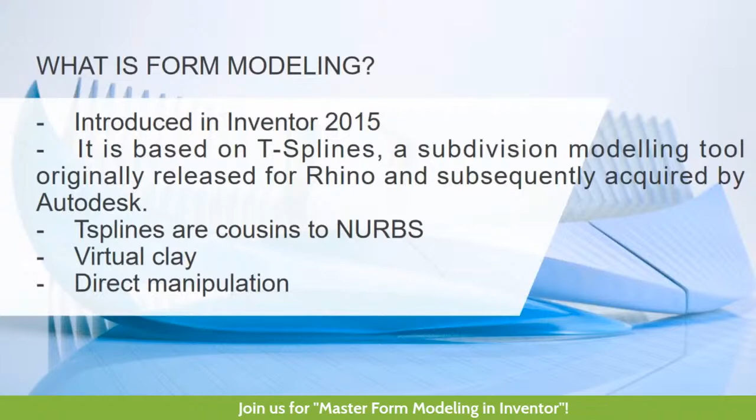So why do we need form modeling? It is faster and more intuitive modeling. It is used to enhance a model to create a more visually compelling design. Creating highly shaped parts can be difficult using conventional modeling techniques, but freeform tools provide an alternate modeling approach to explore and create freeform shape models using direct manipulation. And lastly, it's easy to achieve smooth corners and shapes.

In this section, we're going to talk about the difference between a solid and a surface. A solid is considered a lump of material, and it has a parametric design with parametric history associated with it — you've got extrusions, revolutions, fillets, holes, and similar features to build a solid model. It has mass that can be associated with a material, and the material density combined with the volume gives you that mass. It also has a center of gravity calculation, and it permits operations like your join command, or your join, cut, and intersect options in extrude and revolve.

The difference from a solid to a surface is best thought of as an infinitely thin sheet of material. It has no mass whatsoever, and surface modeling focuses more on the external aspect of an object, developing it by stretching a surface over it with freeform tools available in Inventor.

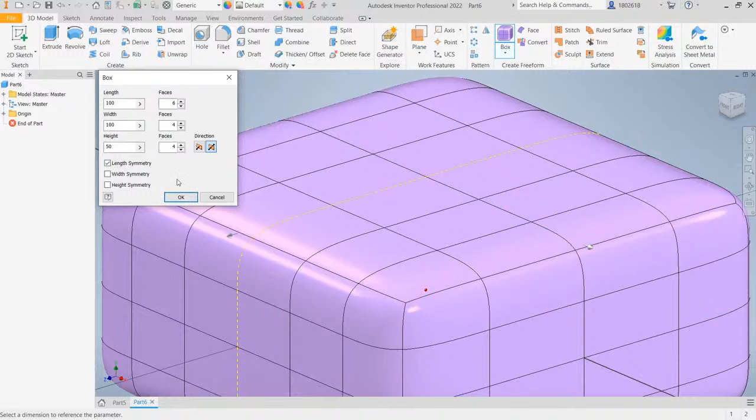Zoom out your view using your mouse wheel, then drag it to the center, and let's proceed to the next step. Click the Freeform tab. On the Edit panel, click Edit Form, and the dialog box will appear.

On the Edit Form dialog box, choose a filter to select a specific type of geometry. For points, only points are available for selection. For edges, only edges are available for selection. For faces, only faces are available for selection. For all, points, faces, and edges are available for selection. And for a body, the whole body is available for selection.

Optionally, in the Edit Form dialog box, choose Selection Options. Select Loop after you select an edge to select the entire chain. But first, we need to change the filter to Edge in order to select the edge of the figure. Then left-click on this edge, then click Loop under the Selection option. And as you can see, there is a loop in this line.

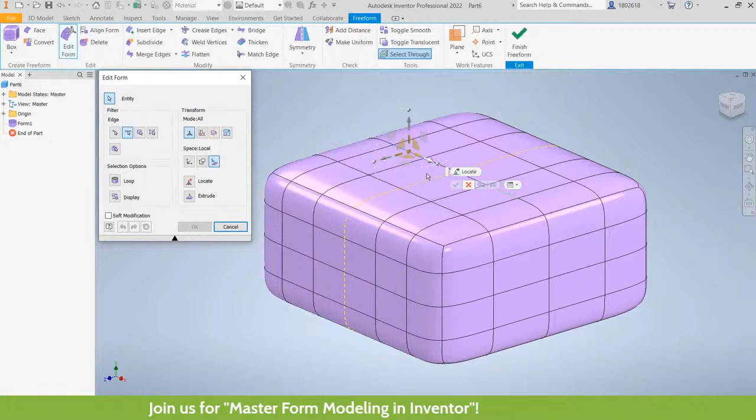And now we are done talking about Edit Freeform Geometry. Let's proceed to the next command.

In this video, we will talk about Align and Delete Freeform Geometry. Use Align Form to precisely reposition the model from a source symmetry plane or vertex to a target plane. Click the Freeform tab, and under the Edit panel, click Align Form, and the dialog box will appear.

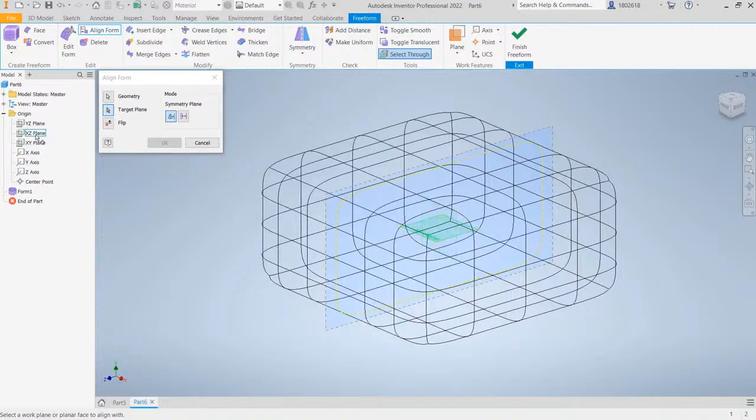Enable the Symmetry Plane option if the body contains a defined symmetry and you want to select a symmetry plane as the origin. Left-click the symmetry plane, then select the target plane or planar face as the origin. For this one, we will use the XZ plane. As you can see, our figure aligned to the XZ plane. Then click OK to exit the dialog box, and let's proceed to the next command.

For the next command, use Delete to refine the model to get the shape you are looking for. Click the Freeform tab, and under the Edit panel, click the Delete command, and the dialog box will appear. For the filter, left-click with this point, and you can delete some points. Press Shift to select multiple objects. Then click OK, and as you've noticed, some edges that connect to that point have been deleted.

Click the Delete command again. For the face, left-click with this one. Left-click, left-click, left-click, and left-click. Then click OK. As you can see, we now have an open sheet body.

To delete a loop, double-click an edge to create a loop, then click the Delete command on the ribbon panel. As you've noticed, the loop has been deleted.

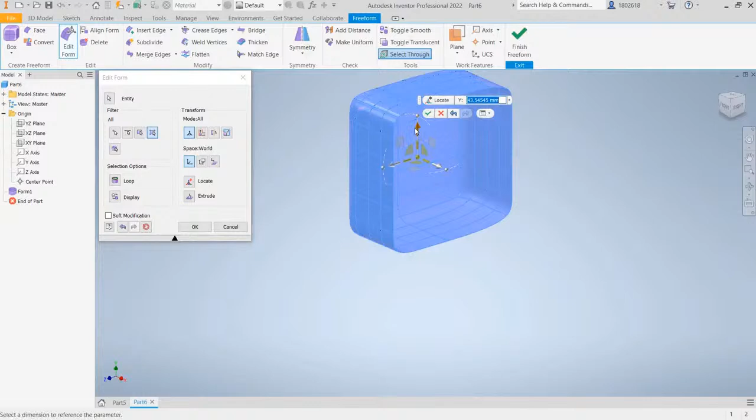Drag it to the center, then drag this manipulator upward. As you can see, we can freely move the figure, or just type the distance, 45. Then click OK, and drag it to the center. Now we are done with Align, Delete Freeform Geometry, and Move a freeform body.

In this video, we will talk about how to work with freeform edges. As you've noticed on our screen, we have two boxes set in freeform. For the first part, click the Freeform tab, and under the Modify panel, click Insert Edge, and the dialog box will appear. Use the Edges selector to select edges in the graphics window. Left-click with this edge.

In the Insert Edge dialog box, enter the location. The location specifies the position of the new edges using decimal percentage; the location must be between -1 and 1. You can also use a negative number for the location to reverse the insertion side of the edges. Just type negative on this one.

Then specify the insertion mode. For the first figure, we will use Simple as the insertion mode. It adds the edges you specify, which may alter the shape. Click Single as the insertion side, then click OK. For the second figure, click Insert Edge again, then left-click this edge on the figure. For the insertion mode, click Exact, then click OK. Exact adds the edges you specify plus extra edges to maintain the current shape.

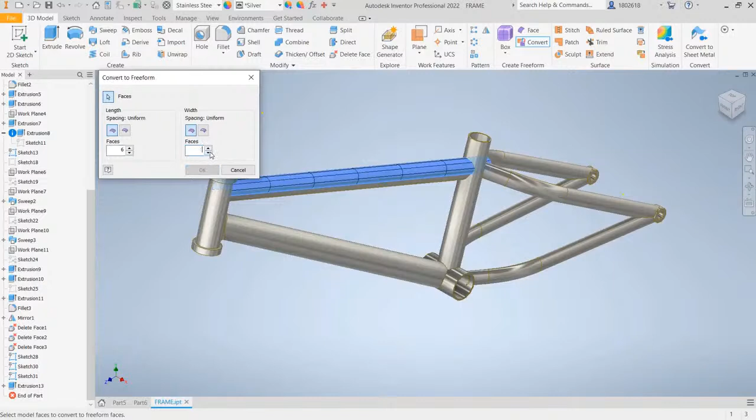Then click Uniform, and for the length key in 6, and for the width key in 7, then click OK. Our freeform feature is added to the browser, and the Freeform tab appears on the ribbon panel.

To apply changes symmetrically to the surface, you must add symmetry. From the Symmetry panel, select Symmetry, and the dialog box will appear.

Use Orbit to change the view of the figure, then press Escape to cancel the command. Select Face 1, and for Face 1 select this one, and for Face 2 select this one. Then click OK. Now you need to give freeform volume.

From the Modify panel, select Thicken, and the dialog box appears. Then select a freeform surface and key in 5 for the thickness.

Then cycle through the available types: sharp, soft, and no edge. Select sharp and make sure that the direction is normal and in the outer direction. Then click OK.

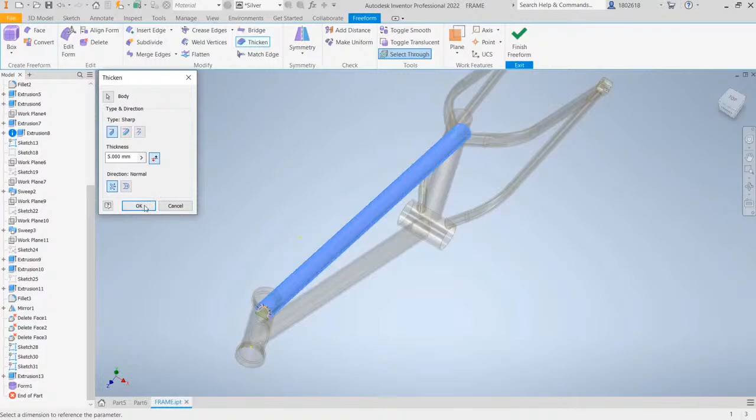You can divide some faces into smaller faces. Select Subdivide on the Modify panel. In the Subdivide dialog box, you are prompted to select faces.

Left click on this one for the first face, then key in 2 for the width, key in 2 for the length, and use Exact as the mode to preserve the current shape. Then click OK to exit the Subdivide dialog box.

Then click Edit Form on the ribbon panel, and the Edit Form dialog box will appear. Zoom in your view using your mouse wheel.

Press Ctrl to select multiple faces. Left click, and left click again. Zoom out your view, then zoom in on this one.

Left click, then change the mode into Translational. Left click. Translation reduces the number of manipulators on the screen.

After that, spot the difference between the space of World and Local. Click Local, and as you can see, the direction of the manipulator changes. Drag this arrow or specify the distance, key in 15, then press check to OK.

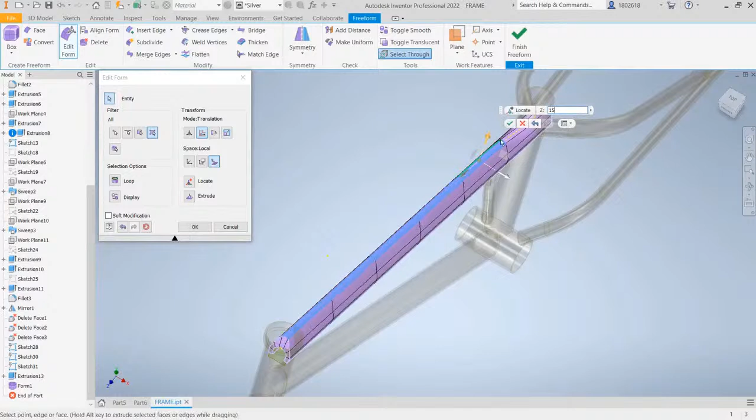As you can see, the shape of the body of the frame of the bicycle changes. Then click Finish Freeform on the Exit panel to exit the freeform environment.

With this video, creating freeform shapes to align with existing solid features is made easier with the Freeform Convert tool. Use this tool to help you build your freeform shape around your solid models. See you on the next video.

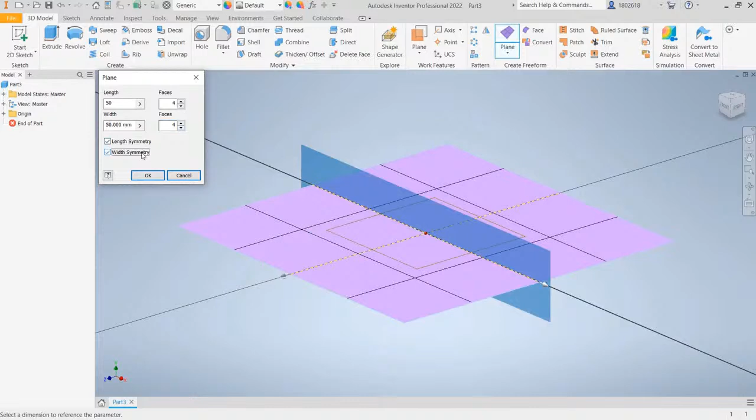To place the plane, click the XZ plane, then click the projected origin point at the center, and a preview appears. For the length, key in 50 with 4 faces, and for the width, 50 with 4 faces. Make sure that the length symmetry and width symmetry are checked.

Then click OK to exit the dialog box. Select this face, and as you'll notice, the 3 other sides are also selected because the symmetry of the figure is activated. Click Subdivide from the Modify panel, which splits existing faces into 2 or more faces, providing more control and detail to the freeform body. For the number of faces, width is 2, length is 2, and for the mode, click Exact to maintain the original form of the plane.

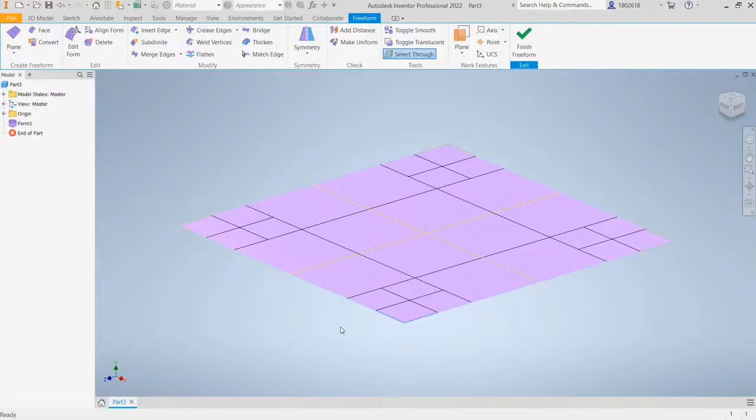Then click OK to exit the dialog box. After that, select these 2 edges on this side - press Ctrl or Shift to select multiple edges. Left click, then click Edit Form under the Edit panel, then click Extrude on the dialog box, then drag this arrow down. As you can see, a new shape forms because of the Extrude command.

Just key in -50, then click Check. Zoom out our view using your mouse wheel, then drag it to the center. Zoom in again, then drag it to the center. As you can see, we made 4 legs from a simple plane with the help of Freeform commands.

Then we need to select this edge from the leg of this stool. Click the arrow down beside Crease Edges, then select Uncrease Edges to remove a crease from the selected edges. Press Ctrl and select the edge of the bottom part of the leg. Click Insert Edge on the Modify panel. Leave it at 0.5 for the location, and for the mode, simple.

Then click OK. We need to insert 2 edges in order to create a support for the leg of the stool. Click Insert Edge again, press Ctrl, select these 2 edges, key in 0.7 for the next location, and leave it at simple.

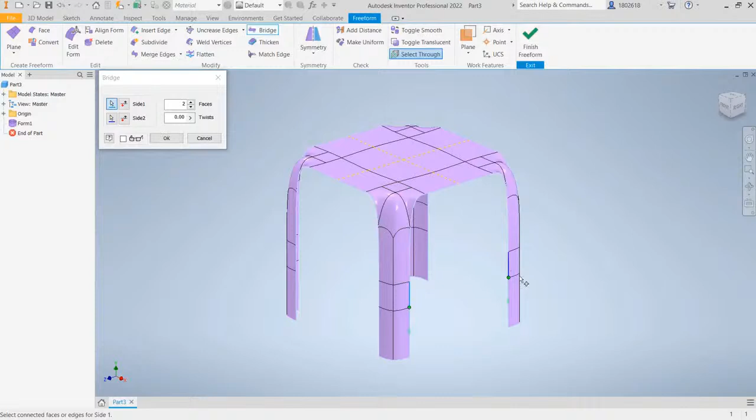Then click OK, and now we have these 2 edges. After that, we need to connect these 2 figures using the Bridge command. Click the Bridge command on the ribbon panel. For the first side, click on this side, and for the second side, click on this one. Then click OK. Repeat the process on this side.

To connect these 2 sides, click the Bridge command again. First side, left click, and for the second side, left click. Then click OK.

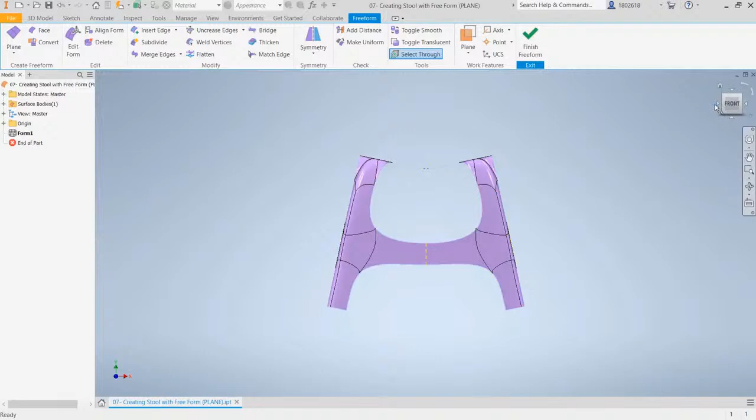Then click Check. Change the view on the view cube, left click anywhere in the workspace again, make sure it's in the green selection, right click, click Edit Form, change it into rotation, specify the rotation as -12, then click Check.

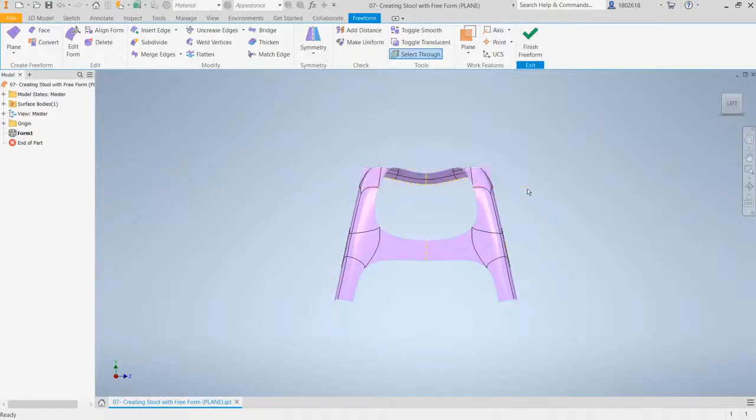After that, we need to flatten this part. Left click at the upper side of our figure, and the red selection would appear. Make sure the part we want to flatten is in the red selection, then select Flatten on the Modify panel. As you can see, it is already flattened. Click OK, then click Home on the view cube to get a good perspective on our figure.

Left click at any of these faces, then right click, click Edit Form, then drag this translation downward, and specify distance -5.

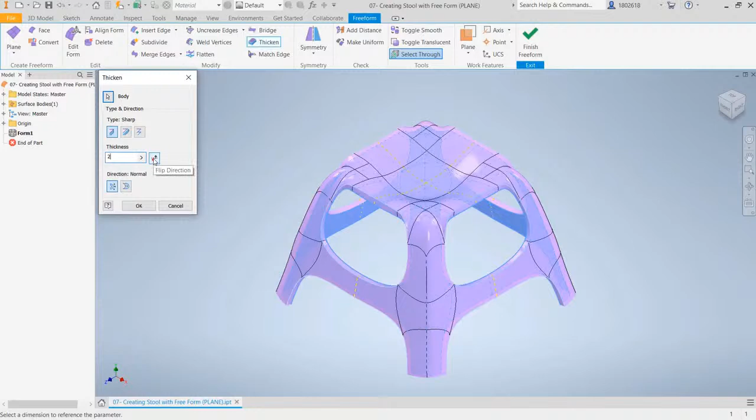Then press Enter. For the next step, we need to use the Thicken command to convert an open surface to a solid with soft or sharp edges. Click Thicken under the Modify panel, then click your figure. For the type, use sharp, and for the thickness, key in 2. Make sure the direction is normal, then flip the direction. Then click OK.

And now we're almost done with our stool. Click Finish Freeform on the Exit panel to exit the Freeform environment. Now our Freeform figure is in a solid form.

We just need to make a hole in the center. Just click the plane under the work features. Select Offset from plane, then click the origin from the model. Just click this XZ plane, then click the front view in the view cube.

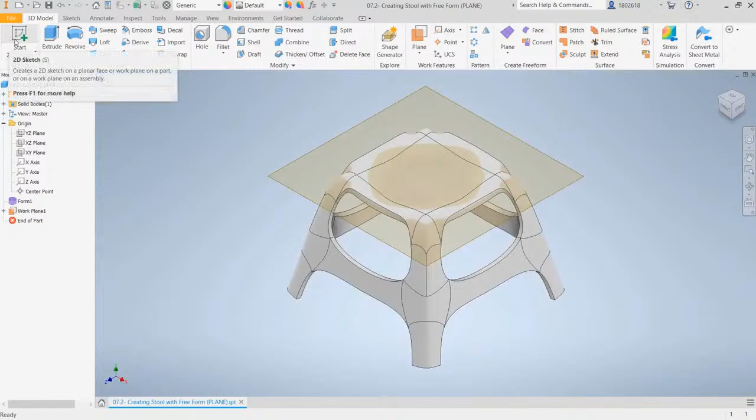Then drag this arrow down, or specify the distance -3, then press enter. Click the home view again on the view cube. Then click the Start 2D Sketch under the 3D Model tab. Select this plane to create a new sketch.

Then click the Circle command under the Create panel. Specify the center of the circle on this center. Then key in 12 for the radius, then press enter. Then click Finish Sketch from the Exit panel.

After that, we just need to use Hole under the Modify panel. Then click the center of the circle to make a hole. Then type the radius 10, then click OK. Select the work plane from the model, then right click, then uncheck the visibility of the work plane.

After that, we need to make a fillet on this side and this side. Just click the fillet command under the modify panel. Then key in 0.5 for the radius. Then left click the edges that you need to fillet. Left click, left click, left click again.

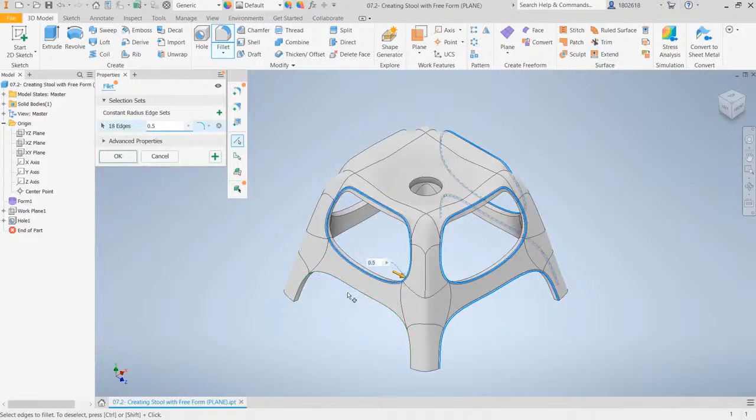And left click. Change the view in the view cube. Select this upper corner of the view cube. Left click, left click. Change the view again in this upper corner. Then left click, and left click. And now we're done making our fillet. Just click OK to exit the fillet command.

Just click the View tab on the ribbon panel. Select this visual style and change it into realistic. Then change the material into anything you like. And for this one, we're going to use light red.

And now we're done creating a stool with Freeform.

In this video, we were going to make a phone stand out of two boxes using Freeform tools. To get started, we need to set our units into millimeters. Just click the Tools tab, select the document settings, click the units, then change the length from inch to millimeter, then click OK.

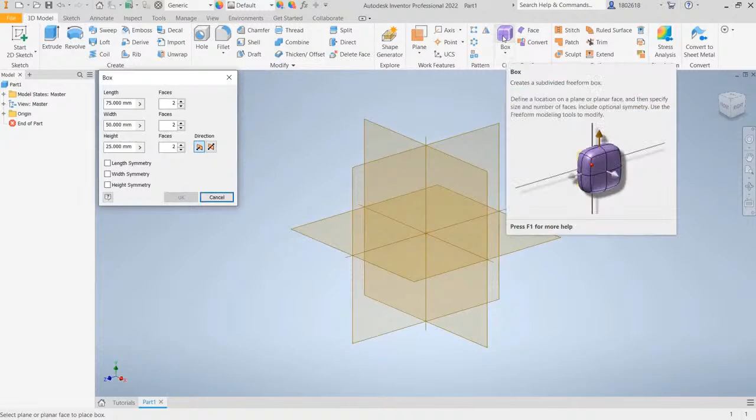Click the 3D Model tab. Under the Create Freeform panel, select the box. To place the box, click the XZ plane, then click the projected origin point at the center, and a preview appears. In the dialog box, key in 75 for the length, and for the width, key in 100.

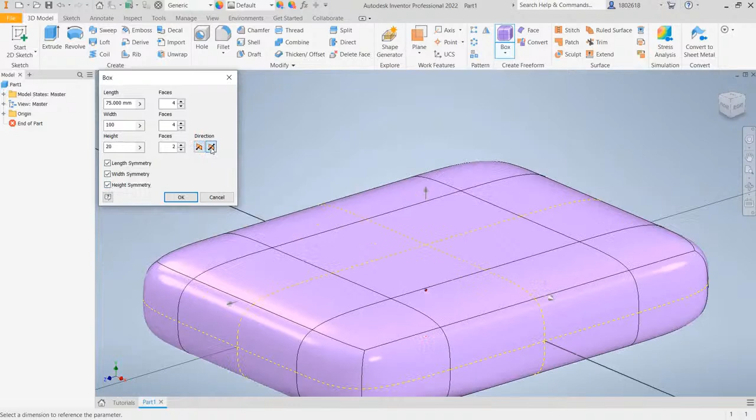And for the height, key in 20, and for the faces, key in 4 for the length, and for the width, 4. Then make sure that the length symmetry is checked, width symmetry is checked, and the height symmetry is checked. And for the direction, choose both direction, then click OK.

Place another box, but this time on the XY plane. But first, let's just zoom out our view using our mouse wheel, then drag it to the center. Under the Create Freeform panel, select Box, and for the origin, click the XY plane. Then specify the point of origin at the center.

Key in 120 for the length, 75 for the width, 20 for the height. Click both directions. Key in 6 for the faces. Key in 4. Check length symmetry, width symmetry, height symmetry, then click OK.

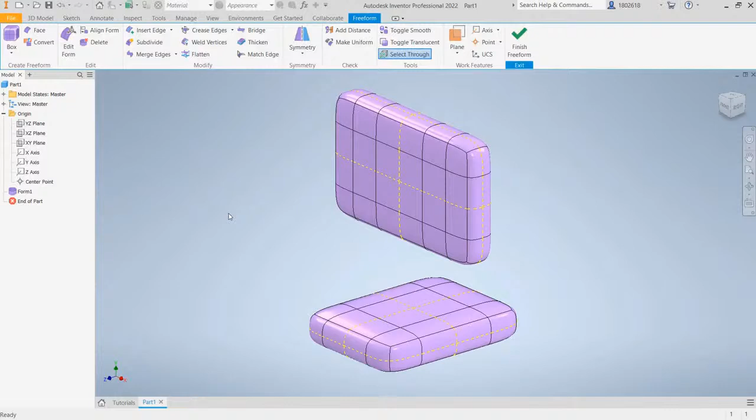Drag our figure to the center. Then we need to change the view in order to view the back of the second figure. But first, we need to move this one into the right side. Just click the right view on the view cube.

Then double click this figure to select the whole figure. Then right click, select Edit Form. Drag this translational, then specify the distance 75. Then press Enter.

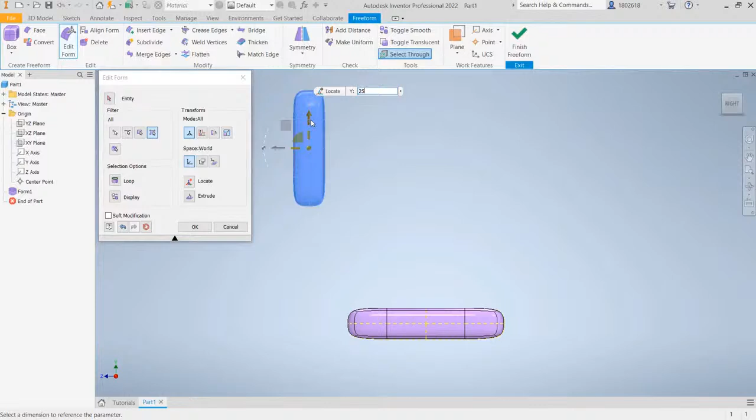Double click again, right click, select Edit Form. Move this translational in upward direction. Then specify the distance 25. Then press Enter. In order to connect these two figures, we need to use the Bridge command.

The Bridge command connects bodies or creates holes in freeform bodies. It allows us to develop smooth connections by specifying faces or edges to the bridge. We need to change the view. Just click the upper left corner of the right view. Then select the Bridge command on the Modify panel.

For the first side, just select these 4 faces. Left click, left click, left click, and left click. For the second side, left click, left click, left click again, and left click. Then click OK, and as you can see, the two figures connect to each other.

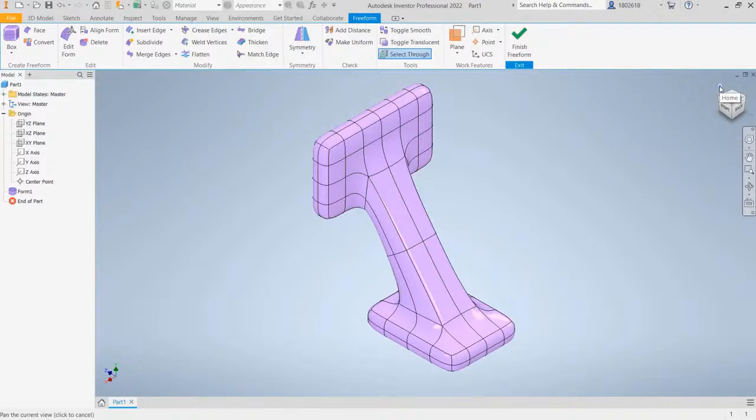Just click the home view in order to view it clearly. After that, we need to use crease edges on these edges in order to create sharp edges.

Just click the crease edges on the Modify panel. Then select the edges that we need to crease. Left click on this one, left click on this one, left click, and left click.

Change the view. Just left click on this corner. Left click on this one. Left click. Change the view again. Left click, and left click. Then click OK. Just click the home view again for the next command.

Then click Finish Freeform on the exit panel to exit the Freeform environment. See you on the next video.

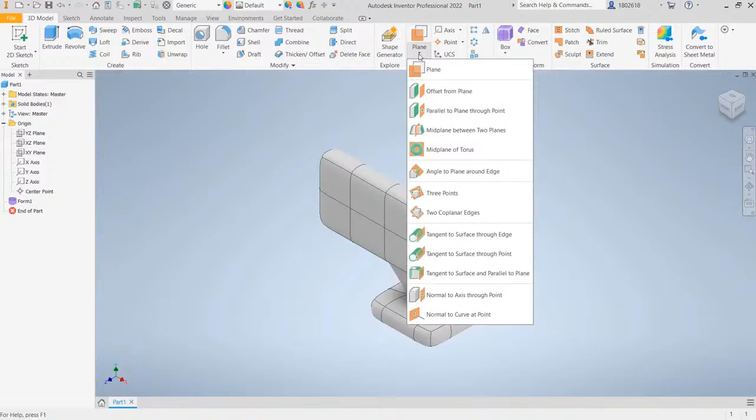For the finishing touches, we need to make an extrude cut part on this face. Just click the plane on the work features. Select offset from plane, and on the origin, just click this XY plane.

Then drag this arrow on this side. Then specify the distance 80. Then click OK. Select Start 2D Sketch under the 3D Model tab.

Select the plane. Then drag it to the center.

After that, just select the Slice Graphics on the lower side of the graphics window. Then click the arrow down beside the project geometry. Select Project Cut Edges. But first, we need to make sure that it is in the construction.

Just click this one first. Then left click this arrow down beside the project geometry. Select Project Cut Edges, and as you can see, there is a construction line on this side.

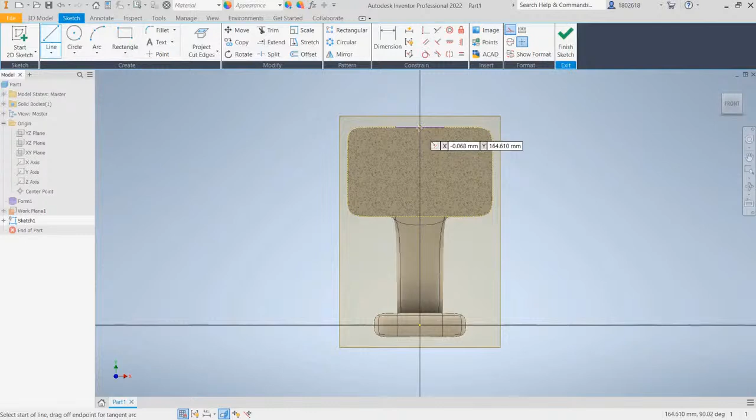Then select the line command under the Create panel. Specify the center on this one. Then type 5, then press Enter.

Enter again. Then select the rectangle command, but make sure it is not in construction line. Left click with this construction.

Click this rectangle under the Create panel. Make a rectangle at any dimension. Left click. Then we need to use dimension under the Constraint panel.

Left click with this first line, and for the second, this one. Type the dimension of 5. Then click Check. And for this side, left click on this line.

Left click on this point. Type the dimension of 5. Then press Enter. After that, we need to use the constraint in order to move in this line.

Just left click on this coincident constraint. Then specify the center of the figure. Then zoom in your view using your mouse wheel to have a better view.

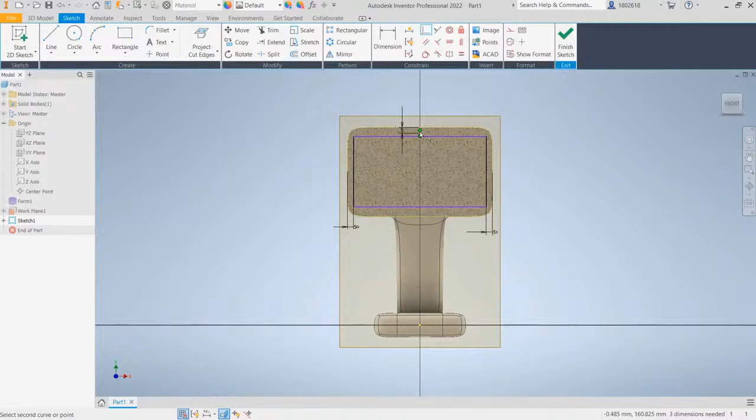Left click at the end point of this line that we've created earlier, and as you can see, it is now constrained.

Left click on the line command again. Specify the center. Type the distance 5, then press Enter. Press Escape to cancel the command.

Select the coincident constraint again. Select the center of this figure and the end point of this line, and now it's already constrained.

For the next step, just click the Finish Sketch on the Exit panel. Then click the Extrude command under the Create panel. Then change the output into Cut.

And now, we're almost done with our phone stand. Then click this work plane, right click, and check the visibility.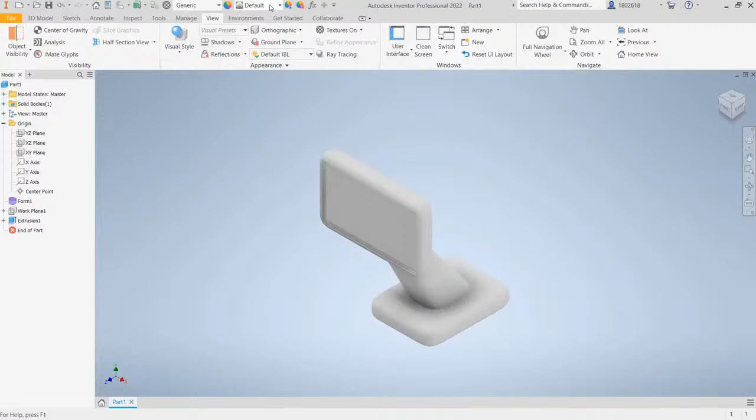And to make it more realistic, just click the View tab on the ribbon panel. Select the visual style and change it into realistic. Then click the material. Change it into orange red or anything you want as your material.

And now, we're done creating our phone stand.

In this video, we were going to make a chain using the Torus command. Under the Create Freeform panel, select the primitive toolset and select the Torus command. And for the plane, just left click with this XY plane.

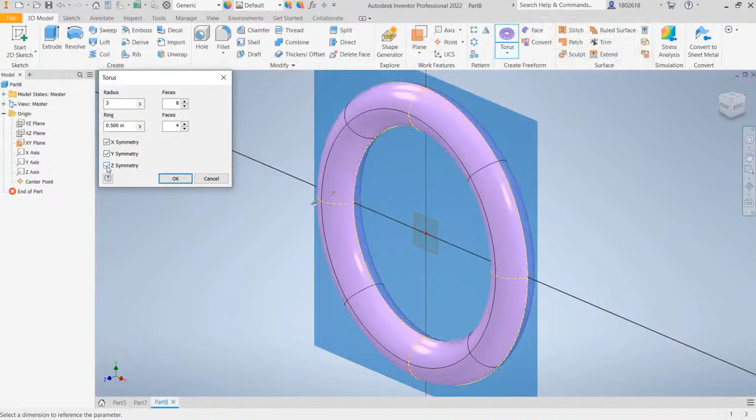Then specify the origin point at the center. And for the radius, key in 3. And for the ring, just leave it to 0.5. Make sure that the 3 symmetry is activated. Just check on this one, check on this one, check on this one, then click OK.

After that, click the front view in the view cube. Select these faces. Just press Ctrl to select multiple faces. Left click, left click, left click again, and left click. And as you've noticed, the other side of the torus is highlighted because of the symmetry.

Just click the home view. Then right click in the workspace. Click the edit form.

Drag this arrow on the right side and key in 1.5, then press enter.

Click the front view again. Select these faces again by pressing Ctrl and left clicking each one. Then click the home view again.

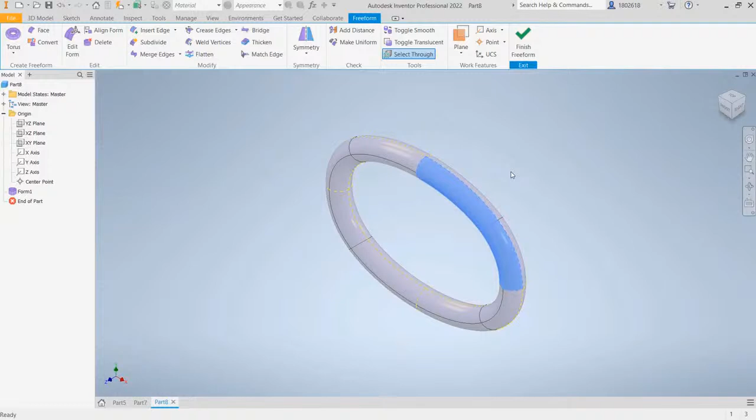Right click in the workspace, click the edit form, drag this arrow on the left side, key in 1, then press enter. Drag this figure into the left side.

We need to copy this figure in order to make a chain. Just double click the figure, then press Ctrl C on the keyboard, then press Ctrl V to paste.

Drag this arrow on the right side, then key in 15, then press enter. Then we need to align this figure on the XZ plane. Just click the align form.

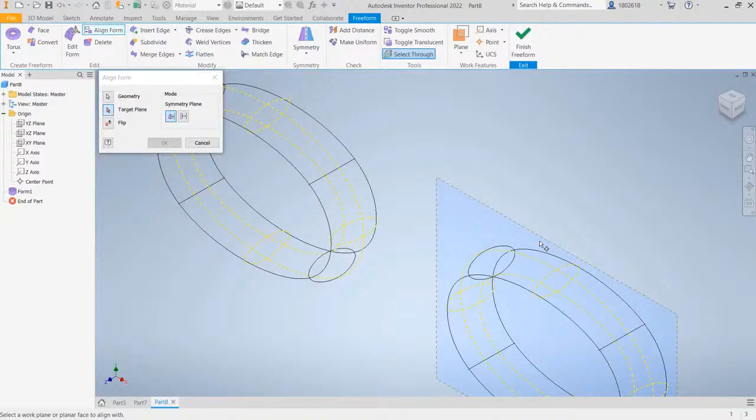Click this XY plane, and on the origin, click the XZ plane to align it on the selected plane. Then click OK to exit the dialog box.

We need to move this figure into this one in order to look like a chain. Double click the figure again, right click in the workspace, click the edit form, drag this arrow on the left side, key in -7.5 for the distance, then press enter.

Zoom out our view using your mouse wheel, then drag it to the left side.

We need to copy these two figures in order to complete the chain. Double click this figure, then press Ctrl to select another figure, double click, press Ctrl C for the copy command, then press Ctrl V to paste.

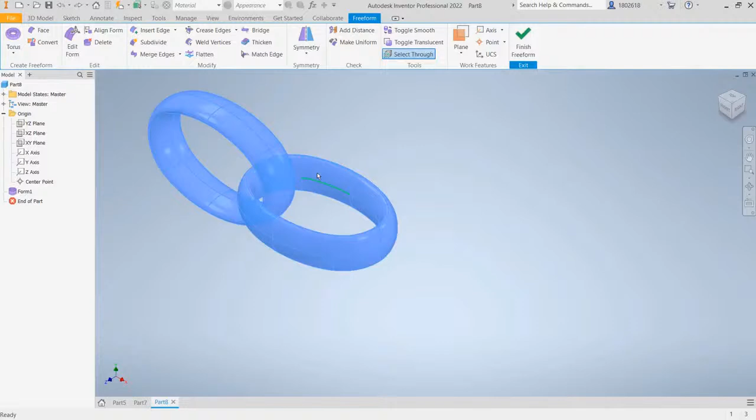Then change the transform into translation. Zoom in your view using your mouse wheel, drag it to the center, then drag this arrow on the right side, then key in 15.

For the distance, then zoom out our view using your mouse wheel, then drag it to the center. And now we're done creating the chain.

Click the Finish Freeform from the Exit panel. And in order to make it more realistic, click the View tab on the ribbon panel, select the visual style, change it into realistic, and for the material, you can select anything you want, but for this one we're going to use gold metal. And now we're done creating a chain with Freeform.

All right, so as we continue our workshop for tonight, Mom Crush, I saw a comment there. She called you Mom Crush. Oh, Mom Crush. As we take a short break, can I just ask a question for you?

When designing the component parts of assemblies, engineers frequently face product development demands that often lead them to rethink how parts might need to be designed and manufactured. Traditionally, an assembly component might be manufactured through molding, casting, or machining from billet to achieve the desired shape. But what if the requirement was for the same mechanical function and equivalent mounting size, but with a reduction in component weight or consolidation of assembled parts?

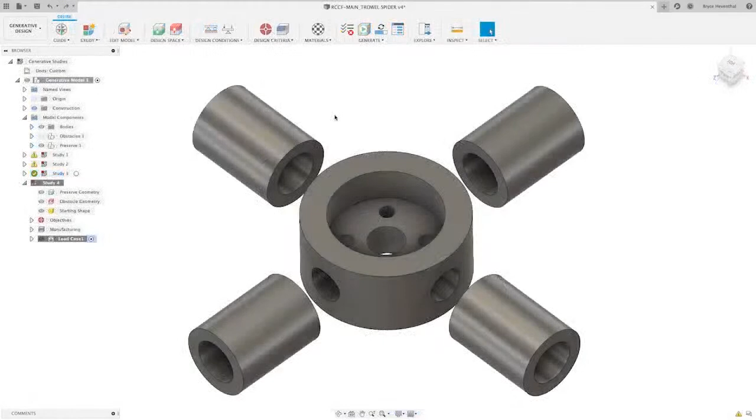Even the most capable design engineers will be limited in the number of possible design iterations they can produce in a given time. Generative design changes this. Combining artificial intelligence with cloud-based computing, generative design uses goals and parameters such as materials, loads, manufacturing methods, and cost constraints to design your parts.

Unlike topology optimization, generative design explores hundreds or even thousands of possible permutations of a solution, testing and learning from each iteration what works and what doesn't. Successful design alternatives are quickly presented, where the ideal optimized design, which caters for the desired method of production, such as 2D machining or 3D metal additive printing, can be chosen and sent out to be manufactured.

If the critical requirement is to reach the minimal weight of a component, for example to reduce the energy required to rotate a mechanism, then 3D metal additive printing might be the best solution. Additive manufacturing can be used to produce parts that would be difficult to manufacture conventionally, with the option to replace solid structures with strong, lightweight, hollow components containing internal latticing.

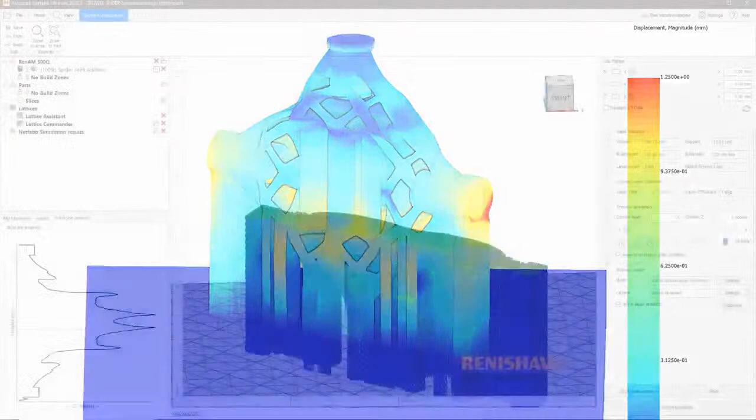The additive build can be simulated to predict any issues, before models are sliced with the 2D toolpaths necessary to control a laser to print the part. Printed parts can then be quickly and easily machined for accurate final finishing.

In this example, you saw Autodesk Inventor for the CAD design and assembly modeling, and Autodesk Fusion 360 for the cloud-based generative design, Autodesk Netfabb for the additive print simulation and manufacture, and Autodesk PowerMill for the toolpath creation and machining. So whether you're looking for additive or subtractive processes, or a hybrid of the two, standardizing on Autodesk technology will help you to make anything.

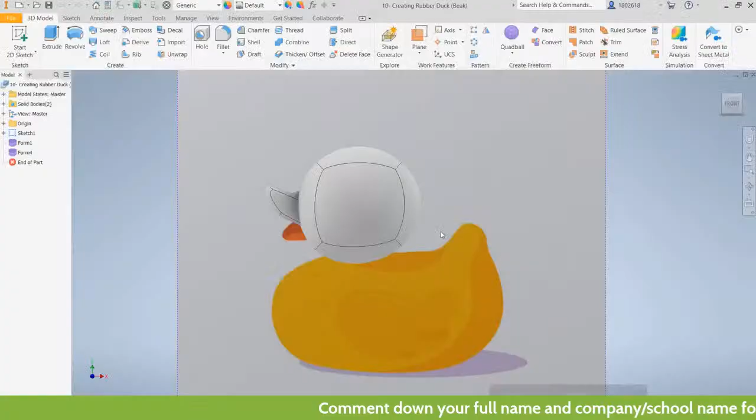In this video, we were going to create a rubber duck with Freeform. To get started, we need to set our units into millimeter. Just click the tool tab, select the document settings, click the units, and change the length into millimeter. Then click OK to exit the document settings.

To officially start, on the 3D Model tab, select Start 2D Sketch, select the XY plane, and under the Insert panel, select Image, then click the reference image that we need, the rubber duck, then click Open. Zoom out your view to place the image. Drag it to the center using your mouse wheel, then place it to the center, then left click to insert. Press Escape to cancel the command. Then click the Finish Sketch on the Exit panel.

Zoom out your view using your mouse wheel, then drag it to the center. Under the Create Freeform panel, select Quadball. Click the XY plane, then click the front view in the View Cube. Then zoom in your view in order for us to place the Quadball easily.

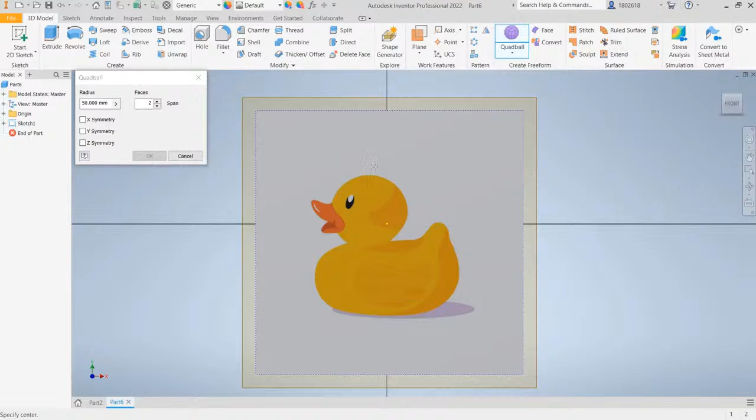Left click at the center of the head, then key in 7 for the radius. Make sure that the X symmetry, Y symmetry, and the Z symmetry is activated. Then click OK. Zoom in your view again.

As you can see, we need to align this Quadball into our figure using Edit Form. Just double click this face to highlight the whole figure, then right click, click the Edit Form. Use this translation command in order to place this Quadball into our figure.

Then press Enter. Just left click on this face, then right click, click the Edit Form. Then move this arrow to the right side until we trace our figure. Then press Enter.

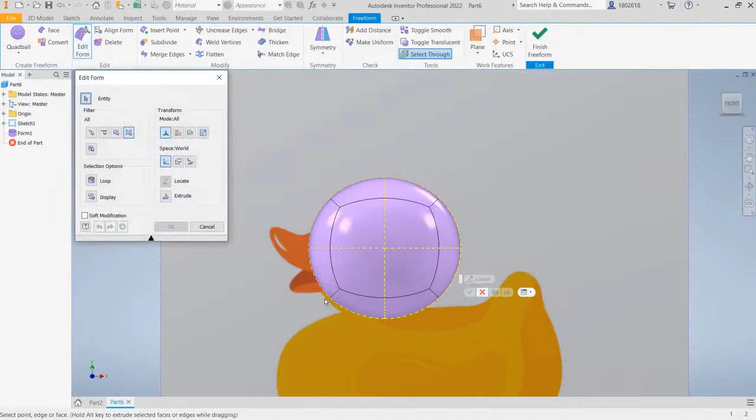Then left click anywhere in the workspace. Click the Edit Form, select the filter edge. Select this edge, then move this translation command until we trace the figure completely. Then press Enter. After that, select the toggle translucent under the Tools tab in order for us to view if the Quadball is already aligned on our figure.

If it is not, left click anywhere in the workspace. Click the Edit Form, select the edge on the filter. Left click with this edge. Just move the scale manipulator until it's exact on our figure. Then press Enter. After that, we need to stretch these edges in order to trace the figure.

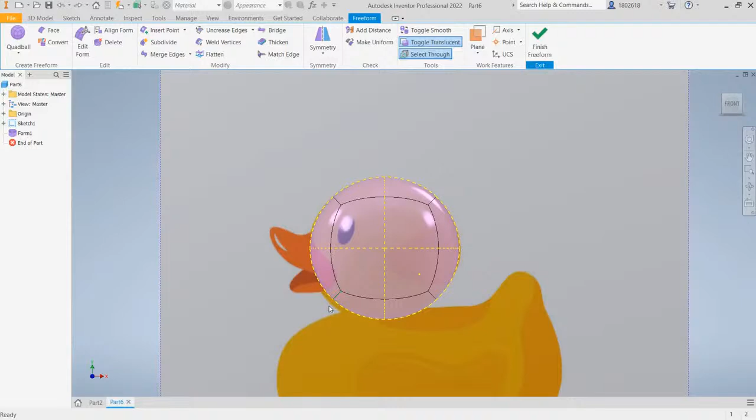But in order to do that, we need to clear the symmetry on the Quadball. Just select this arrow down on the symmetry panel, select the clear symmetry, then select our Quadball. And as you've noticed, there is no symmetry.

Right click anywhere in the workspace. Click the Edit Form, select the edge on the filter. Left click with this edge. Move this translation manipulator until we trace the figure completely. Then press Enter. Proceed to the next side.

Right click, click the Edit Form. Select these edges, select this edge. Use this translation manipulator, then press Enter. On this side also, right click, click the Edit Form, use this translation manipulator.

Then press enter. Then we need to move also these edges. Right-click, click the Edit Form, select the edge. Left-click on this edge, then use the translation manipulator, then press enter.

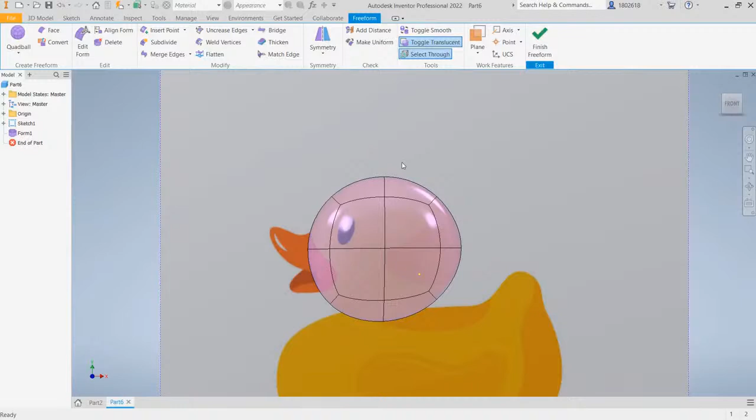And now we're done with our head. Select the Finish Freeform under the Exit panel. See you on the next video.

For the second part of creating the rubber duck, under the Create Freeform panel, select the Quadball. Select the XY plane, key in 1.5 for the radius, and make sure that the Z symmetry is activated. Place the Quadball at the beak, then click OK.

Zoom in your view using your mouse wheel. Then we need to stretch this one. Right-click, click Edit Form, use the translation manipulator, then trace the figure, then press Enter.

And for this side, right-click, click Edit Form. Use the translation manipulator to trace the figure, then press Enter.

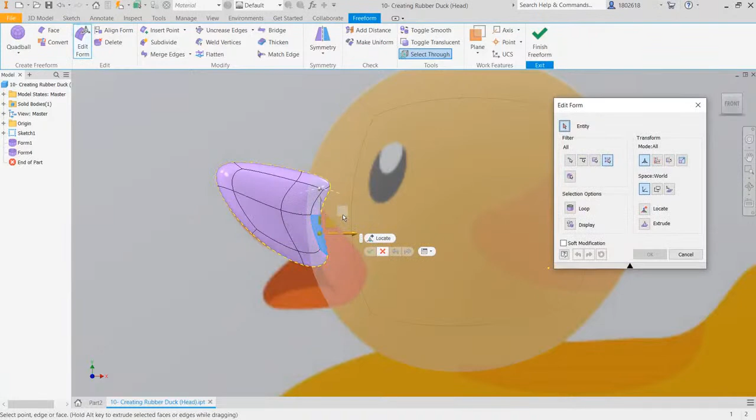For this side, click Edit Form, use the translation manipulator, then press Enter. For this one, click Edit Form, use the translation manipulator to trace the figure, then press Enter.

And for this edge, right-click, click the Edit Form, then move the translation manipulator, then press Enter.

Right-click, click the Edit Form, use this translation manipulator to compress, then press Enter. For this edge, click the Edit Form, use the scale to stretch also.

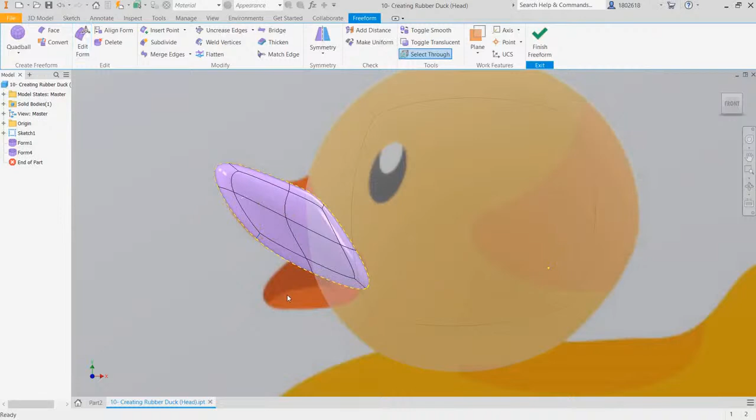Then repeat the process until you trace the figure completely using Edit Form, Translation Manipulator, and other manipulators. Then press Enter. Then we need to use Insert Point, left-click, use Exact as the mode.

Then place the point here in order for us to trace the beak easily. Zoom in your view using your mouse wheel. Right-click, click the Edit Form, select the edge as the filter. Select on this edge, then use the translation manipulator to trace the upper side of the beak.

Then press Enter. After that, we need to use Toggle Translucent to clearly view the figure. Right-click on this edge, click the Edit Form, use the scale to compress the figure.

Then press Enter. Right-click on this Edit Form again, use the Translation Manipulator, then press Enter.

For this edge, click Edit Form, use the Translation Manipulator again, then press Enter. And for this edge, use the translation manipulator, trace the upper side of the beak, click the edit form.

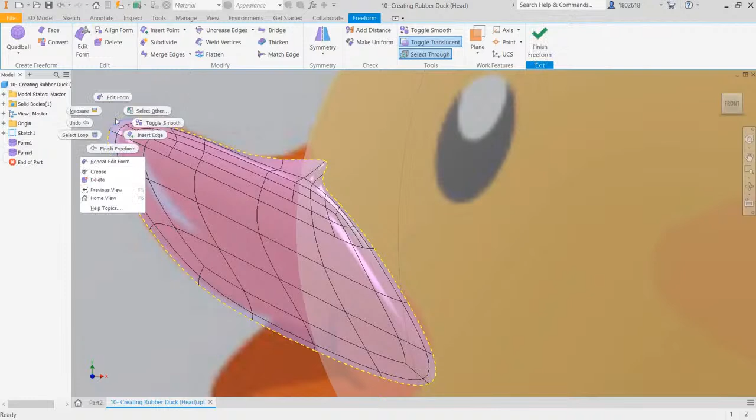Just try and try until you trace the figure completely. Right-click, click Edit Form, use this translation manipulator, then press Enter. For this edge, click the Edit Form, use the translation manipulator again, then press Enter.

Then use the translation manipulator on this edge, trace the figure, then press Enter. And for this edge, click the Edit Form, translation manipulator again, then press Enter. And for this edge, click the Edit Form, then compress it using the translation manipulator, and press Enter.

And for this point, right-click, click the Edit Form, use the translation manipulator, then press Enter. Then click Finish Freeform on the Exit panel, and as you've noticed, it is not aligned.

Left-click at any of the faces, select Edit Freeform, right-click, click the Edit Form, move the translation manipulator to trace it, then press Enter.

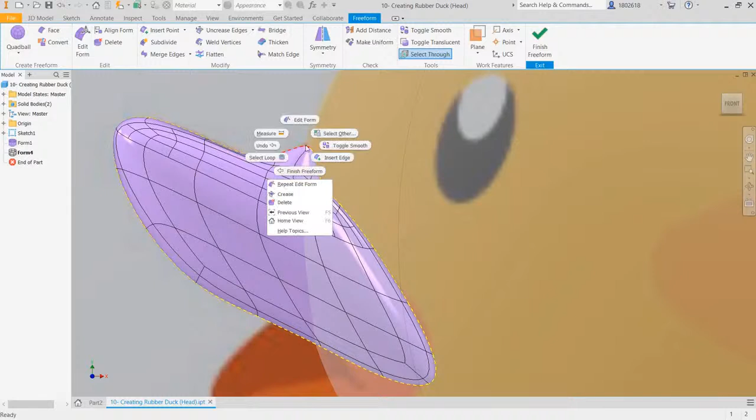Right-click, click the Edit Form, use the translation manipulator, then press Enter. Then select Finish Freeform, and now we're done for the second part. See you on the next video.

For the continuation of creating the beak, under the Create Freeform panel, select Quadball, select the XY plane, then zoom in your view using your mouse wheel, key in 1 for the radius, select Z symmetry, then place the Quadball into the beak, then press Enter.

After that, right-click, click the Edit Form, use the translation manipulator to trace the figure, then press Enter. On this side, right-click, click the Edit Form, translation manipulator, then trace the figure.

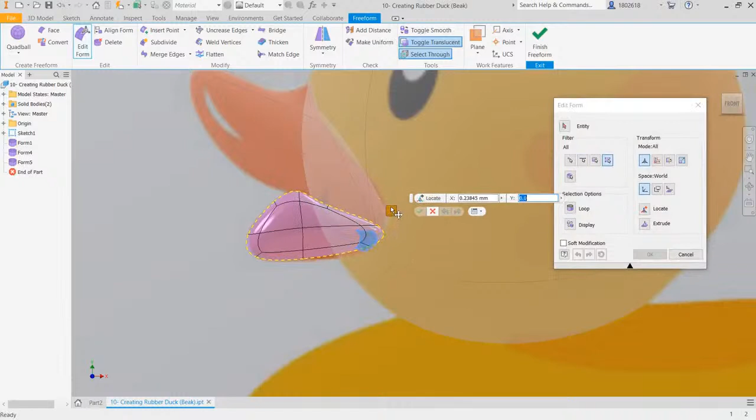Right-click, click the Edit Form, move the translation manipulator again, then press Enter. On this edge, click the Edit Form, drag this arrow down, then press Enter. On this edge, click the Edit Form, use the translation manipulator, then press OK.

For this side, right click, click the edit form, then press check. Click the edit form again, drag this arrow down, then press enter. Click the edit form, drag this arrow up, then press enter. And now we're done with the second part of creating the beak.

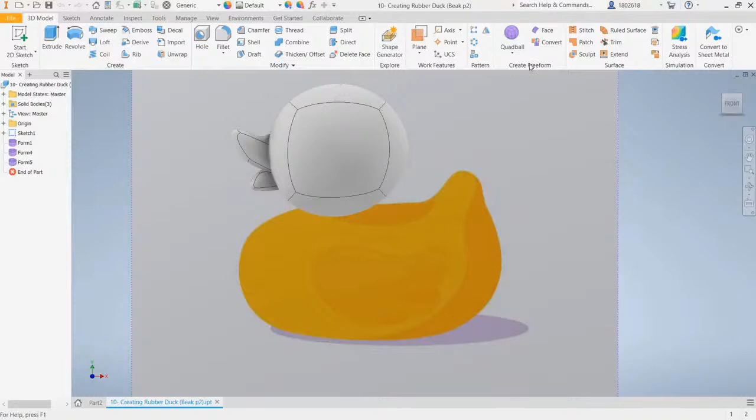In this video, we are going to create the body of the rubber duck. To get started, under Create Freeform, select the Quadball, key in 7.5 for the radius. Make sure that the X, Y, Z symmetry is activated. Select the XY plane, place the Quadball, then click OK.

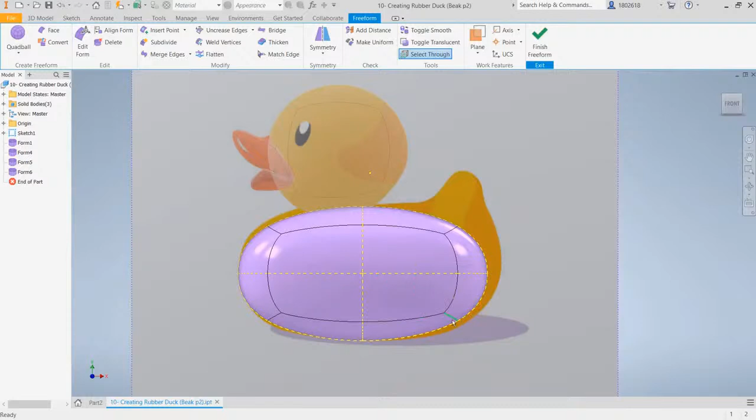After that, right click, click the edit form. Move the arrow on the right side to stretch, then click OK. Right click, click edit form, move this arrow down, then click Check. On this edge, right-click, repeat Edit Form, move this Translation Manipulator, then press Enter.

Double-click this face to select the whole figure, click the Edit Form, move this arrow on the right side, and for this arrow, upward. Move this arrow again on the left side, then press Enter. In order for us to edit the freeform freely, we need to delete the symmetry.

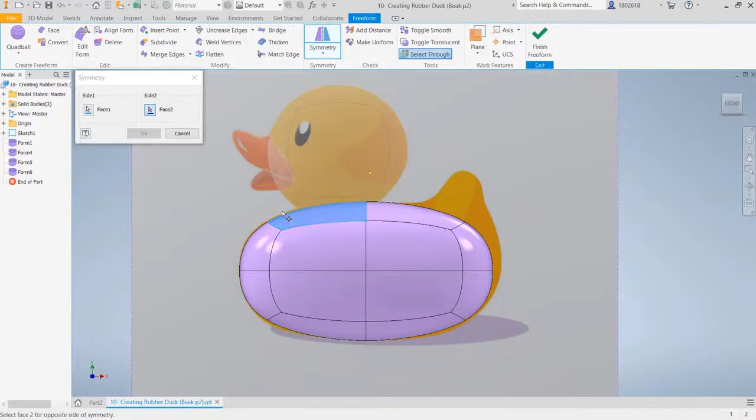In order to do that, select the symmetry, click the Clear Symmetry, then select the figure. As you've noticed, there is no symmetry, but we need the Z symmetry. Just click the symmetry, select this face, then click the home view, select the other face on the other side, then click OK. Then click the front view, zoom in your view using your mouse wheel.

Right click, click the Edit Form, select the edge, left click on this edge, use the Translation Manipulator, then press Enter. Right click, click the Edit Form, left click on this edge, use the Translation Manipulator, then press Enter. Right click, click the Edit Form, use the Translation Manipulator again, then press Enter.

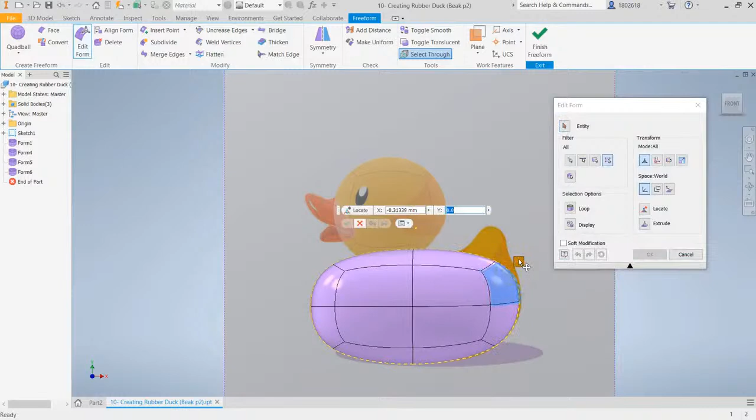For this edge, click the Edit Form, use the Translation Manipulator, then press Enter. For this edge again, click the Edit Form, use the Translation Manipulator to trace the figure, then press Enter. For this side, right-click, click the Edit Form, then use the Translation Manipulator on the right side, then press Enter. On this face, click the Edit Form, then use the Translation Manipulator again, then press Enter.

Then we need to use Insert Point. Click the Insert Point, click Exact as the mode, insert the point here, then click OK.

Zoom in your view, drag it to the center, right click, click the Edit Form, select Edge as the filter, use the Translation Manipulator to trace the figure, then press OK. Right click, click the Edit Form, select this edge, use the Translation Manipulator to fit our freeform into the figure, drag it to the left, use the Translation Manipulator again, then press Enter.

Right click, click the Edit Form, use the Translation Manipulator on this face, then press Enter. And for this point, click the Edit Form, then drag it down, then press Enter. Press Ctrl, then select these edges, drag this arrow down, then press Enter.

For this side, right click, click the Edit Form, drag this arrow down, then press Enter. For this edge, click the Edit Form, select the edge, then drag this manipulator, then click OK. For this edge, right click, click the Edit Form, use the Scale Manipulator and the Translation Manipulator, then trace the figure.

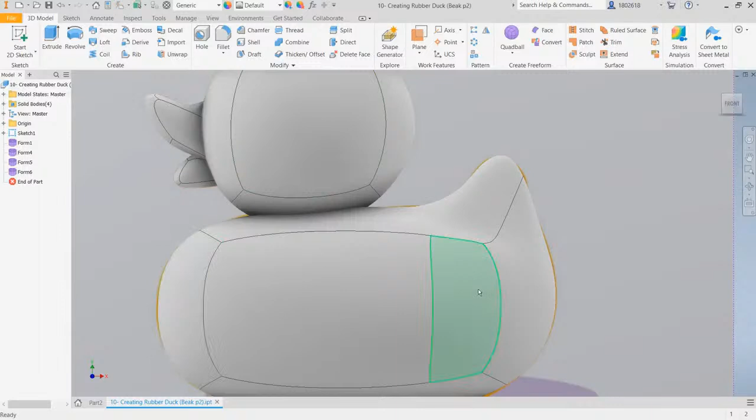If you think our figure is okay, click Finish Freeform on the Exit panel. As you can see, our figure is not aligned on our reference image. Just press Ctrl Z to undo.

Click the Edit Form, drag this arrow on the right side, then click OK. On this edge, drag this arrow up, then click OK. On this edge, drag this manipulator, then click OK. And for this one, drag this manipulator, then click OK.

Then zoom out your view using your mouse wheel and finish Freeform. As you can see, our figure is not aligned with the reference image.

Right click, click the Edit Form, zoom in your view using your mouse wheel, click the Edit Form, then drag this manipulator. Zoom out your view using your mouse wheel, then press Enter.

For this side, click the Edit Form, use the drag manipulator, then press Enter. Then select Finish Freeform on the Exit panel. As you can see, it is not yet aligned to the reference image.

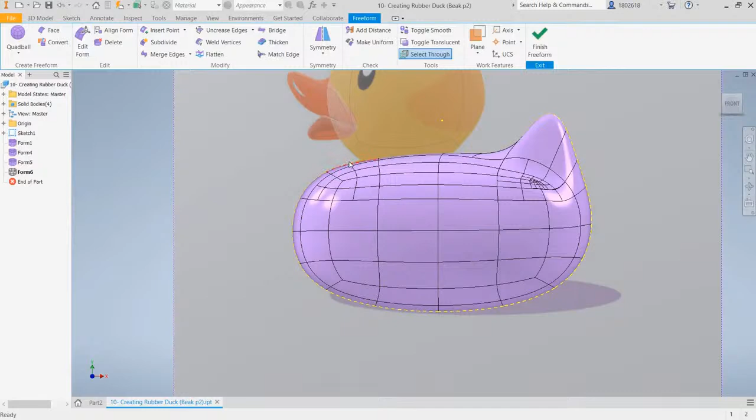Right click, click the Edit Form, right click, drag this manipulator, then click Check. For this edge, click Edit Form, drag this manipulator, then click OK. Click Finish Freeform. Now we're done creating the body.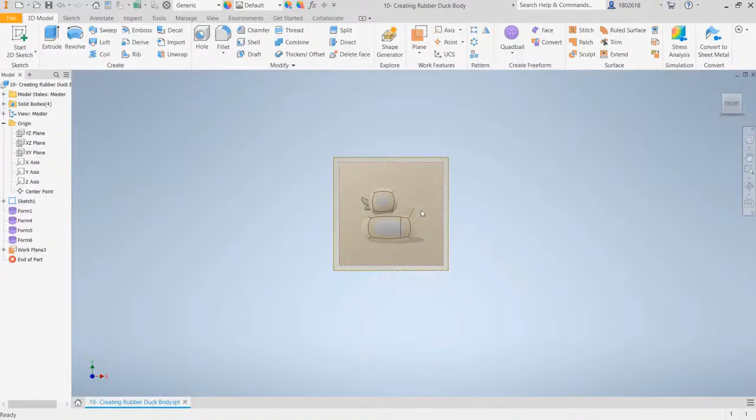After that, click the front view in the view cube. Then zoom in your view using your mouse wheel. Then drag this to the center. Click the Quadball under the Create Freeform panel.

Key in 1 for the radius. Select the Z symmetry. Then place the Quadball on the work plane that we've created earlier. Place the Quadball here. Then click OK. Then zoom in your view using your mouse wheel again in order to stretch the Quadball easily.

Right click on this face, click the edit form, then use the translation manipulator to trace the eye of the rubber duck, then press enter.

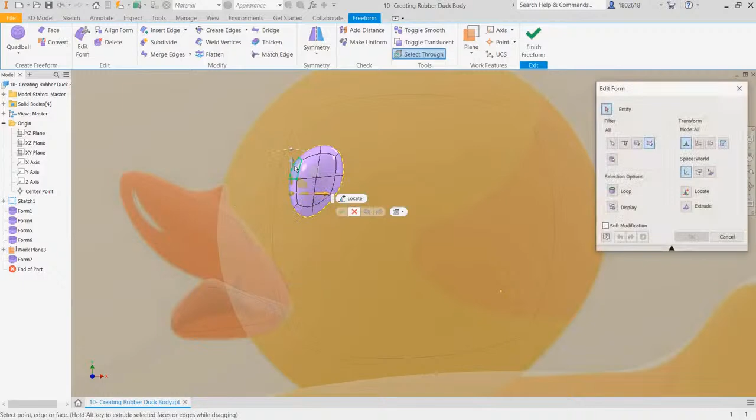Right click on this face, click the edit form, use the translation manipulator, then press enter. Then for this edge, right click, click the edit form, use this translation manipulator, then press enter. And for this side, right click, click the edit form, move this translation manipulator, then press enter.

Then use the toggle translucent in order to view if it is already fit. Select toggle translucent. Then we need to move this edge. Right click, click the edit form, use this translation manipulator, then press enter.

For this side, right click, click the edit form, use the translation manipulator again, then press enter. On this side, click the edit form, use the translation manipulator, then press enter. And now we're done. Click the Finish Freeform to exit the Freeform panel.

Then click the Home View. Then select this side in order to view the other side. Left click. Zoom in your view using your mouse wheel. As you can see, the eye is already attached to the head of the rubber duck. Now let's proceed to the next step.

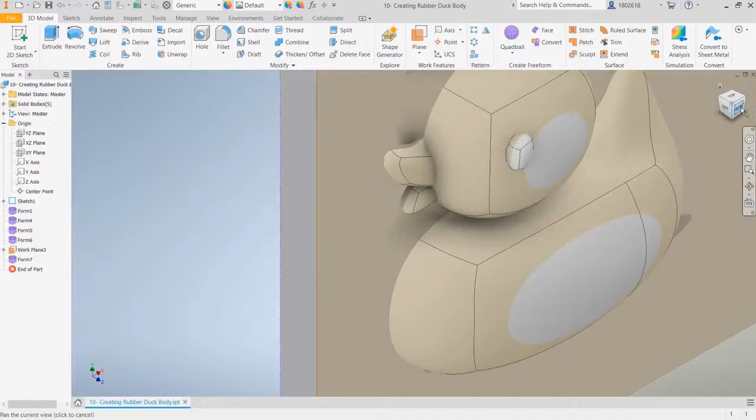Zoom in your view using your mouse wheel. Then drag this to the center. Click the arrow down under the plane. Select Offset from Plane. Click the plane that we've created earlier.

Then click the Home View. Move this arrow at this one. Then press enter.

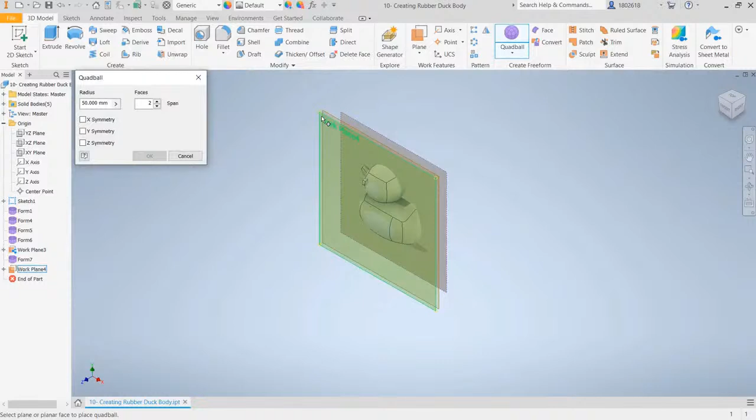Select the Quadball under the Create Freeform. Select the work plane that we've created. Key in a radius 0.5. Then select the Z symmetry. Click the front view in the view cube.

Then zoom in your view using your mouse wheel to place the quad ball. Left click on this one. Then click OK. Then right click. Click Edit Form. Select the body as the filter.

Left click. Then use this translation manipulator to move. Then press enter. Zoom in your view again. Right click. Click the edit form.

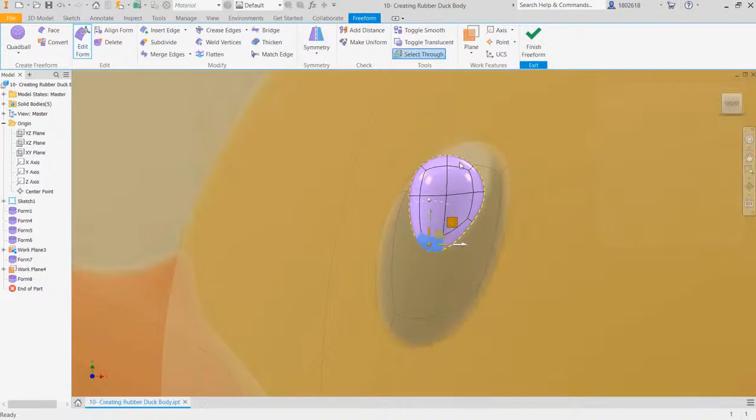Select this face. Use the translation manipulator to trace the white in the eye. Then press enter. And for this face, click the edit form.

Use the translation manipulator again. Then press enter. For this edge, click the edit form. Use the translation manipulator. Then press enter. For this side, click the edit form. Use the translation manipulator. Then press enter.

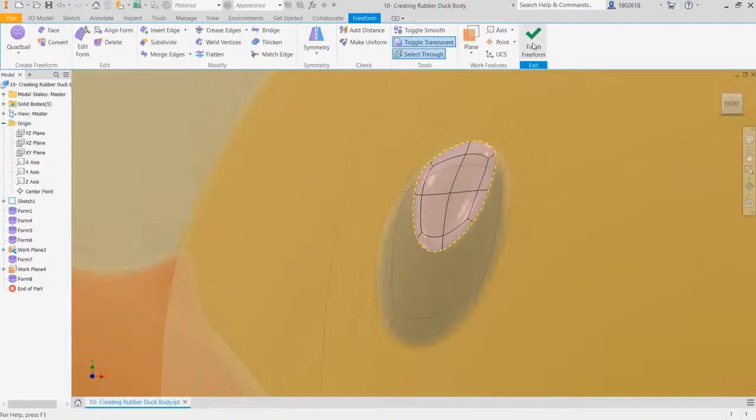Select the toggle translucent if you think it is already fit. And if it is, click the Finish Freeform under the Exit panel. Now we're done creating the eye. Let's proceed to the next video.

For the last part of creating the rubber duck, we need to copy this eye to the other side. Click the home view, then right click on the work plane and check the visibility. For the other work plane, right click and uncheck the visibility, then select this edge on the view cube.

Zoom in your view using your mouse wheel. Then we need to mirror this one. Click the mirror under the pattern panel. Select the mirror solids, left click on this one, then click the mirror plane.

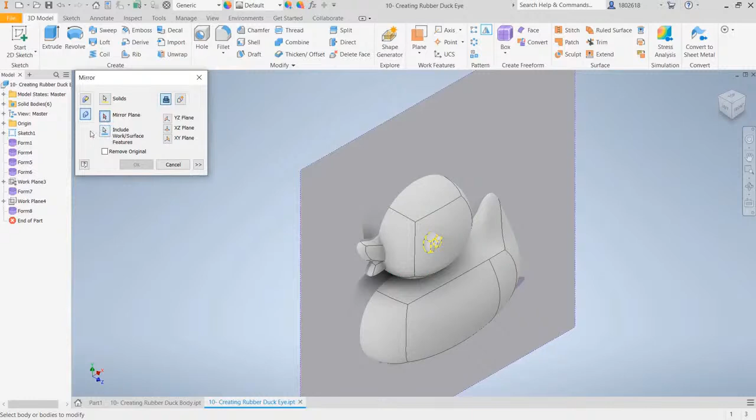Select the origin from the model, then click the XY plane. Click this edge of the view cube, then zoom in your view using your mouse wheel. As you can see, it is mirrored on this side. Then click OK.

Click the home view again, then click the front cube. Zoom in your view using your mouse wheel, and now we're done creating the rubber duck. In order to make it more realistic, we need to change the material of the different parts of the rubber duck.

For the head and the body, select the material, then use glossy gold or anything you want as your material. Left click anywhere in the workspace. For the beak, Form 4 and Form 5, select the material, then type orange, then press enter.

For the eye, left click on this one, select it, then change it into black, then press enter. For the smallest one, click Form 8, select the material, change it into white, then press enter.

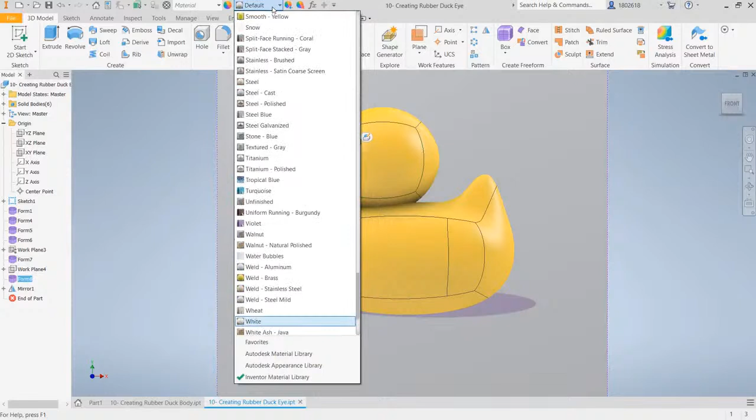For the other side, left click on this corner, and for this corner again, left click at the back, then zoom in your view using your mouse wheel. For the mirror, we're going to use black, but for this one, zoom in your view using your mouse wheel.

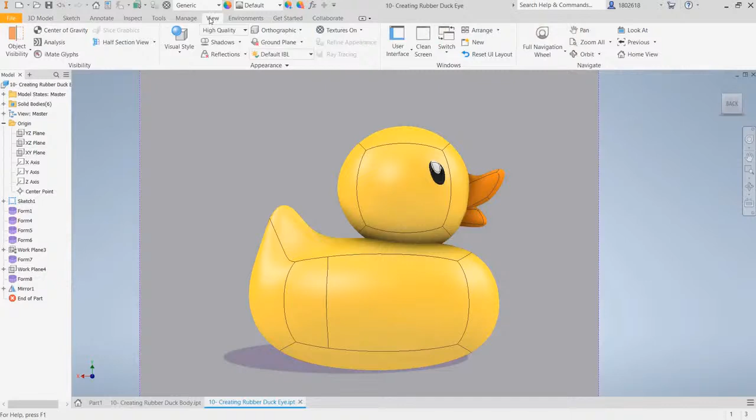Double click the figure to select the whole figure, select the material, change it into white, then press enter. Drag it to the center view using your mouse wheel. Click the View tab on the ribbon panel, select the visual style and change it into realistic. After that, right click on the sketch, uncheck the visibility, and now we're done creating the rubber duck with Freeform.

As we familiarize ourselves with some of the most utilized commands and operations in form modeling, you will be able to try and start your own work.